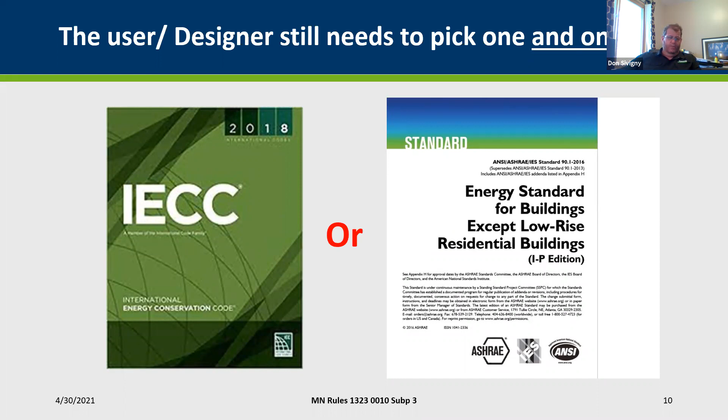Under federal law, we as a state are required to review ASHRAE Standard 90.1 1989 or its successor standards as they're published regarding energy efficiency in commercial buildings. So we're required to review every ASHRAE standard that comes out to determine whether it's one we will move to, through our rule process and adoption process, using tag committees and similar methods.

On February 27th, DOE issued a determination saying the 2016 standard would achieve greater energy efficiency by about 8.2%. That's important because if they determine it does not achieve greater efficiency, states aren't obligated to review and adopt it. Once the determination is made that it would achieve greater efficiency, we have a time frame we're bound by to review and adopt, or at least review and let them know whether we're adopting it and why or why not.

On April 21st, 2021, they issued the determination on the 2019 standard. That's where the time clock started on the department reviewing things and determining what would happen regarding adoption of that document.

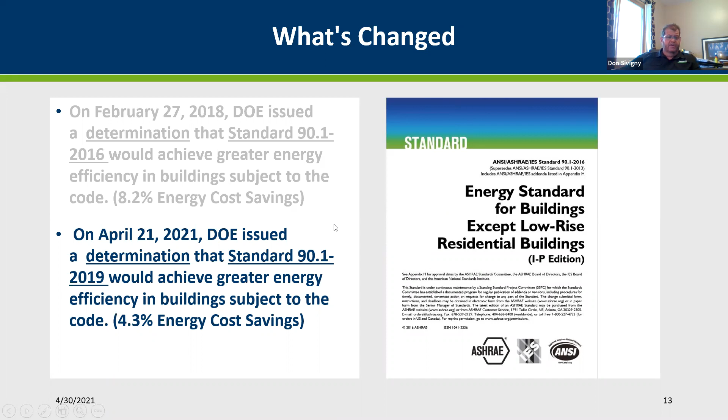On May 28th, the department will be presenting a report to the Construction Codes Advisory Council about that review of ASHRAE Standard 90.1 2019. Greg Metz chaired the Technical Advisory Group, or TAG Committee, and they will be providing that to the Construction Codes Advisory Council for their consideration on energy for commercial buildings in the future.

DOE does not do any official determination on the commercial provisions of the IECC. They only look at the ASHRAE standard and don't officially report on the IECC. So we're following federal law.

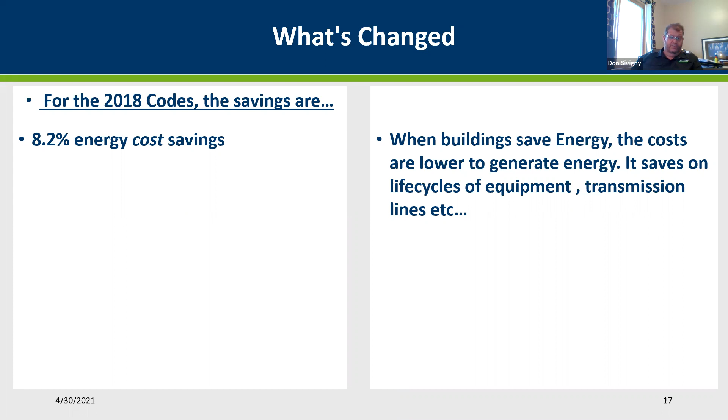They estimate the national savings on commercial energy codes for the 2018 code at an 8.2% energy cost savings. Energy cost savings occur when buildings save energy, the costs are lower to generate energy, and it saves on the life cycle of equipment, transmission lines, and other things. The more energy product put through them, the more wear and tear on the equipment. So by reducing energy use and energy costs, they can now increase the life cycle of the equipment.

There are requirements for source energy. The cost of technology has been reduced, providing off-site and on-site options for renewable energy, such as solar, which is becoming very popular and has grown dramatically. As you drive around Minnesota and the country, you see more solar fields, a lot of times owned by utilities, feeding into the grid system of the areas they provide electrical service to. That's another thing that has increased quite a bit.

Then there's site energy savings, which is what we really go by from a code standpoint. These are the actual savings for each specific new building, based on new codes and new technology, for instance envelope tightness and the efficiency of the envelopes. Creating a tighter building envelope does create energy savings. We understand that tighter building envelopes may require some additional ventilation, but all of that is considered.

Lighting controls are also changing, for offices, hotels and motels, especially suites, where there can be one place that shuts everything off when the occupant leaves the suite for the day. One switch shuts off everything in that unit, the TV, all the lights, and everything else.

Daylighting is a big thing in commercial buildings. We'll talk about bringing in natural light so you can reduce the amount of artificial light you have to produce through luminaires and other things.

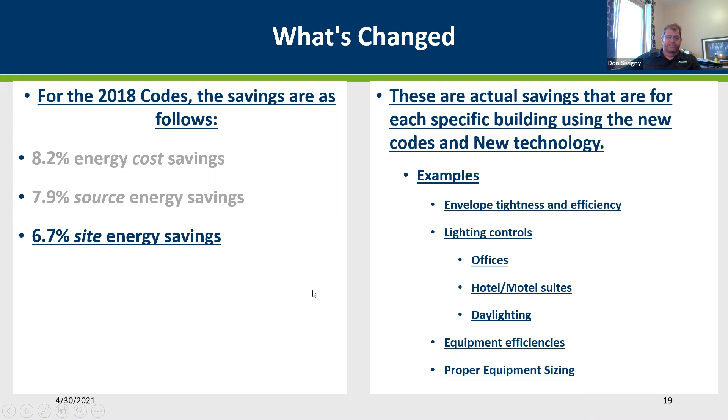Some of the changes we're going to talk about today are in the Minnesota Commercial Energy Code. We're going to review them and go through them as we get through here. Some of them may be kind of confusing. We talk about substantive and quantitative changes and all this, but we'll try to make it pretty simple and put it into some general terminology that everybody understands.

There are not very many substantive changes, probably less than you think, actually. Some are simple changes to the section of the code that don't really have to affect the code language itself at all, but they might be for formatting and things such as that. Those changes happen at the national code level where somebody believes it should be in a different location. We didn't change what the code says, we did change the location, but it is actually a code change. And we look at that national document from that standpoint.

When we get into change of use and occupancies, there are some references to tables and sections that are revised to coordinate with numbering changes made to the 2018 IECC. As we start adding code changes or code language, the numbering ends up changing. So we've seen that in several instances through this document as well.

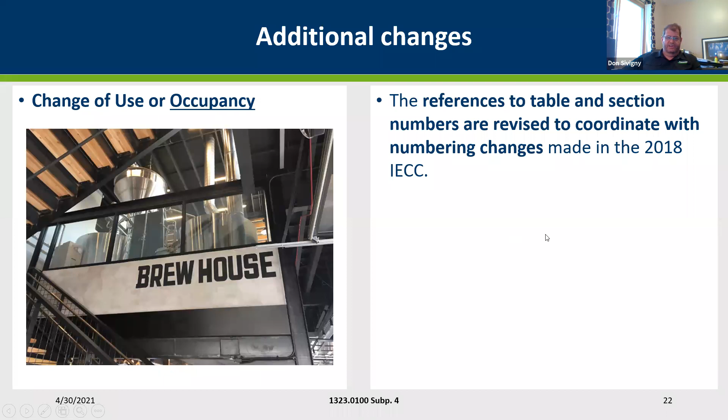ASHRAE addresses changes in use or occupancy as an alteration, and then it sends you to section 5 as it relates to insulation, air leakage, air penetration products, and other portions that are being altered. But it is only for the portions that are being altered. If you don't open up the wall, there's no requirement in the code for you to bring that up to code. The code is typically not retroactive.

We have low energy buildings. We had a previous amendment to this, and we've been able to remove that amendment due to the fact that a repealer is when we remove an amendment, that the requirements for low energy buildings are now located in the IECC in section C402.1.

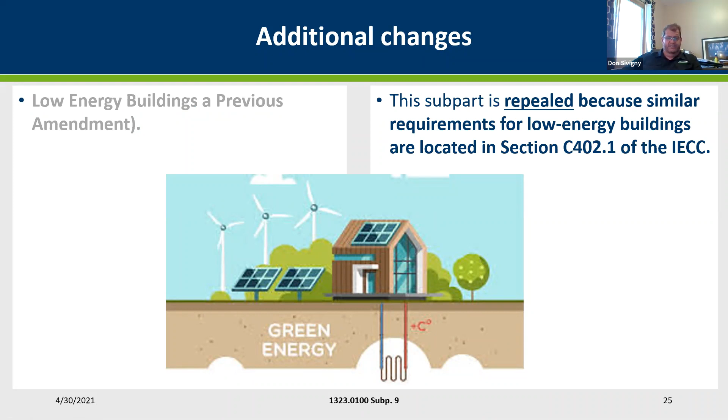For low energy buildings with ASHRAE, they're divided into three different groups essentially. You have conditioned assemblies for both commercial and residential occupancy, and then they add unconditioned assemblies and then semi-heated buildings. So you can have a building that is greater than 3.4, you can use 3.4 to 20 BTUs, and that's what we would call a semi-heated building in the code now, but that's only in the ASHRAE code. The IECC doesn't have that. This is why you need to pick a document and stay with that document.

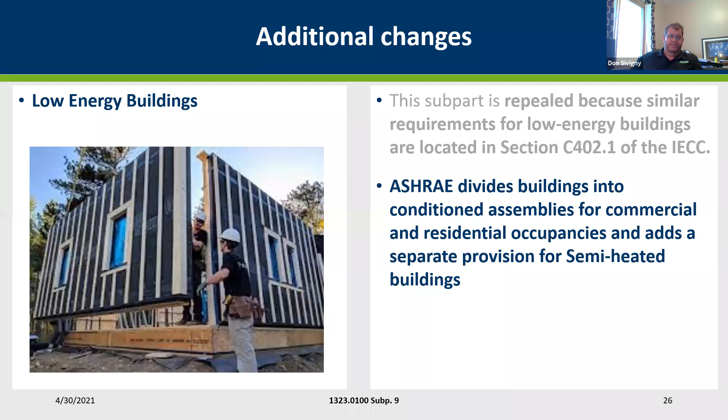The 2012 code did not specifically address greenhouses in any way. They were kind of the odd duck building that was out there. Nobody knew, do I have to enforce the energy code? Do I not have to enforce the energy code? That question came up a lot. And how do you enforce the energy code on a structure such as a greenhouse? That's been cleaned up - greenhouses are now in the code and they're listed as exempt. So they put them in the code to tell you that you don't have to follow it, just to clean that up so that the questions would go away and everybody would be on the same page.

There's a lot of changes in information on construction documents. A lot of details have been reformatted in the format of a list of sub-items. The reason we did that in the codes is to make it easier to use. We want to make the code less complicated, more understandable, and make sure that everybody can come to the same conclusion as they read it.

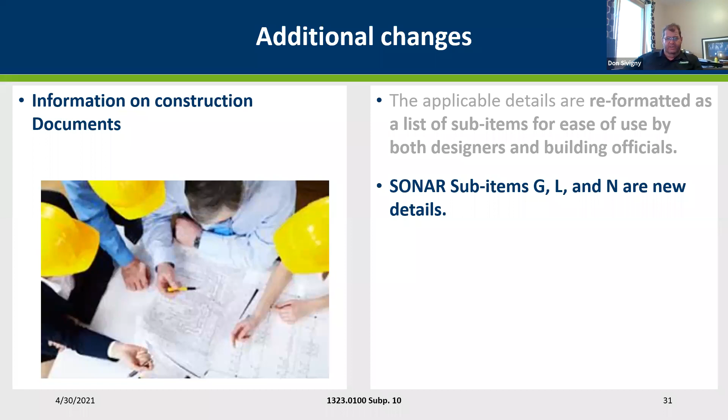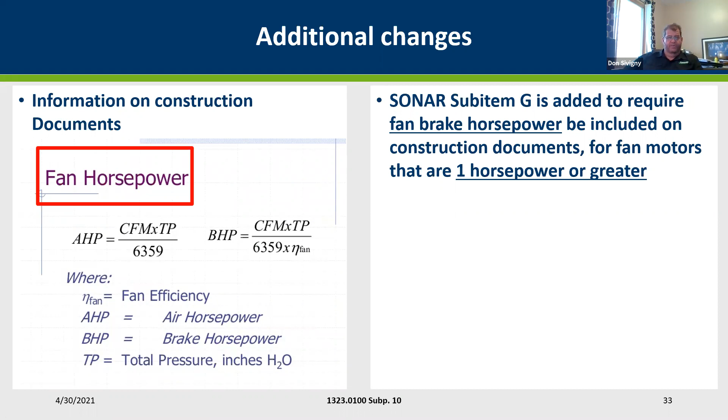The first one is on fan horsepower. It's required to add a fan brake horsepower to the fan equipment itself on any fans greater than 1 horsepower in size. This will guide designers to choose their fans wisely. Preferential treatment for efficiency would be given to variable speed and direct drive fans, as they save substantially more energy.

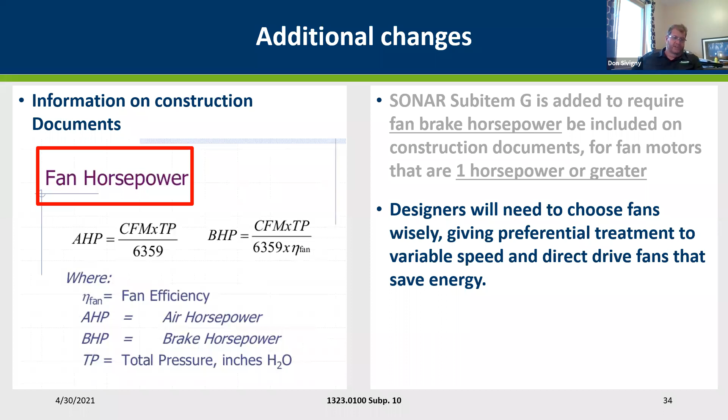We talked a little bit about daylighting. What is daylighting? Daylighting is using the sun's natural light to light the area of space. On commercial buildings that are typically operated during daylight hours, we can utilize the sun's light ray to light the building where we don't need to provide artificial light from an energy source that typically uses a fossil fuel like coal, oil, or natural gas.

Now we actually have a secondary zone. We originally had zone 1. They've now done the research and found that they can add a secondary zone that provides less light than zone 1, as you see in the drawing here, but does provide light at a reduced rate, and we can calculate that in, again saving energy.

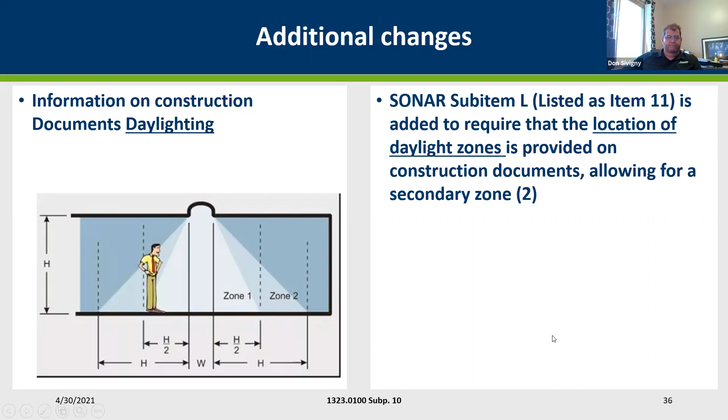Daylighting is the controlled admission of natural light into the building to reduce electric lighting costs. It saves us energy. The sun's got a light ray and a heat ray. The heat ray that the sun sends out is where our windows get involved with fenestration products for heat reflectiveness. They let the light ray through, but they don't let the heat ray through.

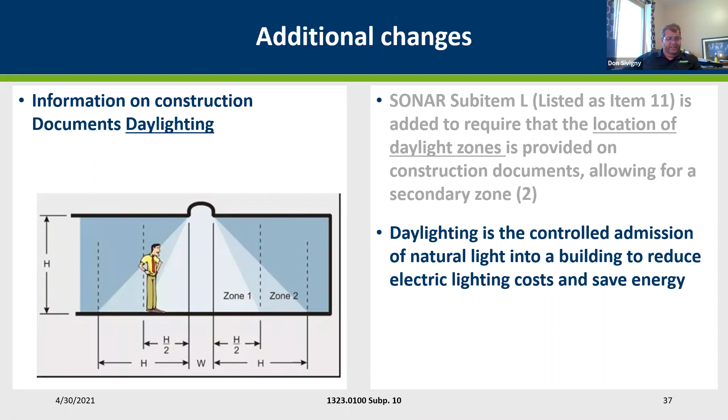Additional details are that they've added sub-item N, which gives the building official the ability to request additional details. We've had cases where a designer is not following the prescriptive approach of the code and isn't using 100% one of the performance options - something in between. This gives flexibility in the design to the designer to work with the building official and come up with something efficient that accommodates the needs of the building owner.

What happens though is that the building official may have questions, and we've had times where they said the building official doesn't need to know that - code doesn't say you need to know that. So they've added something that says the building official can ask for additional details right into the documents themselves. There's also a lot of grammatical changes made to the standard. They're not necessarily changing or modifying the code, but they provide grammatical parallelism and clarity to the enforcement of the code.

There's changes to the definition section of this document. Air barrier construction: the difference between the 2018 and 2012 IECC is that for air sealing of penetrations, we're providing additional guidance for sealing around a very specific item - fire sprinklers. There was never anything in the code to address these, and you've got to be cautious when installing different things around sprinkler heads to make sure we're not impairing that head at all. So they put some very specific things into the code for that.

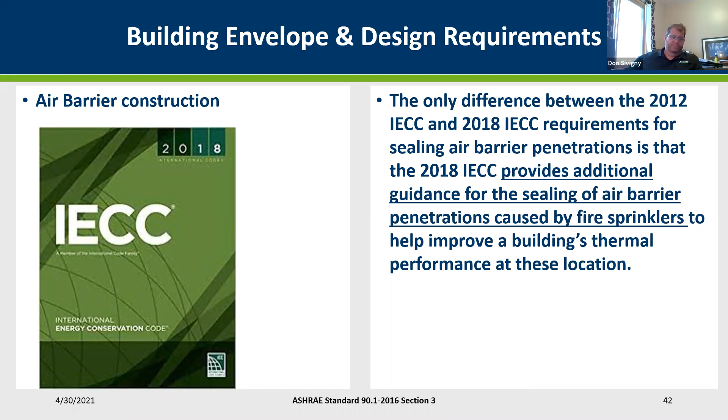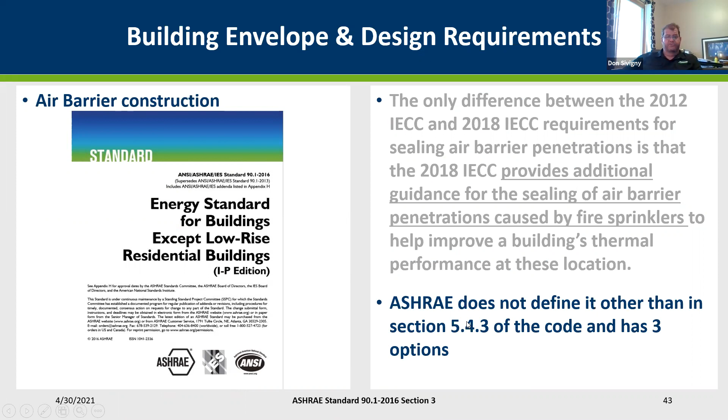ASHRAE does not define it other than to say that in section 5.4.3 of the code, they give you 3 options on air barrier requirements for the building. There's a continuous air barrier design - you've got to provide in your design a continuous air barrier and show where that is. There's 4 sub-items in there to provide you some of that guidance.

There's the installation of a continuous air barrier - this is something a building inspector would see on site, with 5 sub-items they would be looking for at that point in time. You probably could use both of these: the designer designs things, and then in the field, that's part of the plan review for the continuous air barrier design. But when you're in the field, that's where the installation or inspection comes into play. There's another option out there for testing of acceptable materials and assemblies, which requires a whole building pressurization test.

We all know about blower door testing in residential and commercial buildings, but when you get into buildings that are huge in size and multi-stories, how do you pressure test this building? There are ways to do pressure tests on the entire building, but with some of the different wings going out, can you test part of it? This gives you some options to do that.

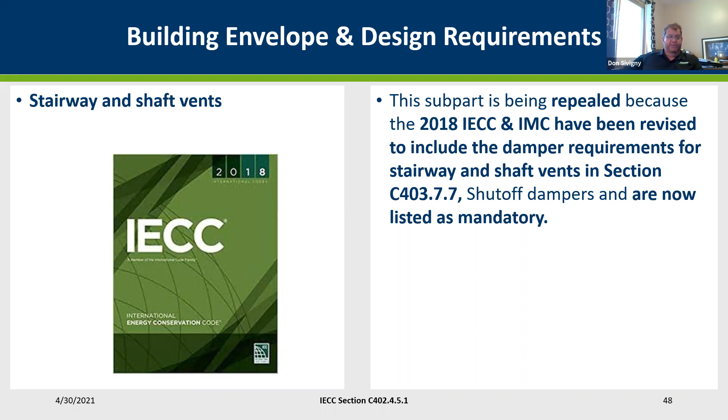There's some provisions in the building envelope and design requirements for stairways and shafts. We repealed this because both the 2018 International Energy Conservation Code and the International Mechanical Code have been revised, and they include damper requirements for stairways and shafts as well. In the Energy Code, it's in section 403.7.7, and these are now changed to mandatory requirements. So you have prescriptive requirements, performance requirements, and mandatory requirements in the code. The mandatory requirements have to be applied to both prescriptive and performance options of the building.

There's requirements for the outdoor air intakes and exhausts as well. This one, again, we repealed due to the fact that it's in section 403.7.7 of the code. And there's also provisions of it in the mechanical code. Again, they are mandatory requirements, so you have to do them no matter which version of the building you want to build, prescriptive or performance.

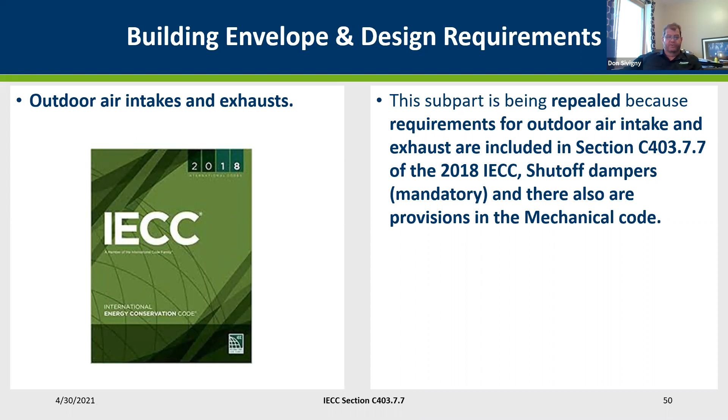Heating and cooling of vestibules. We have an amendment to this one in the current code. We've changed the temperatures there, raising them some to address the issues of freezing that happens in Minnesota climate conditions. If you've ever gone to a retail store with a vestibule, the door is having issues because warm, moist air hits the cold surface out there and freezes. So we've raised the temperature to allow for more heat out there to reduce the amount of freezing that happens.

The other question I get often is, when do I not need a vestibule? Well, if your front entry door of the building opens up to an area that is sectioned off by doorways, not openings, just doorways that close, and is 3,000 square feet or less, it doesn't require a vestibule. So there are some exceptions in the code to that, and that's for our climate zone again, to address the freezing issues.

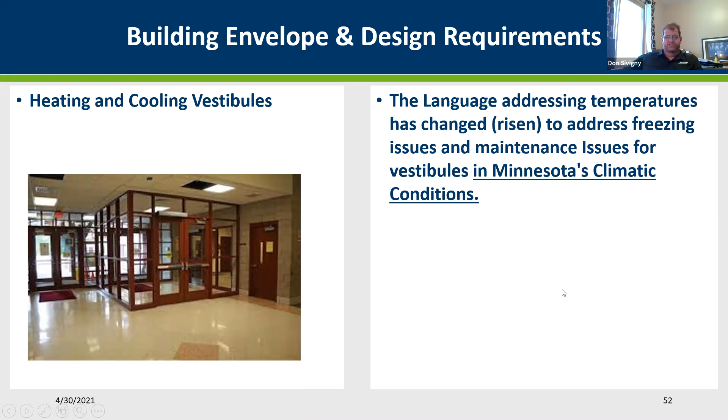There's requirements for minimum pipe insulation in the code. The proposed language modifies a footnote and clarifies that it's not required to have pipe insulation on a radiant heat system. You would think that would make common sense - we have a radiant system, we want that system to release that heat and keep that floor warm, maybe it's above heating downward. Why would we insulate that pipe when the design is to allow that heat to go off? Well, the code didn't say you had to, you could delete it from there. Most people did, but some didn't. So there was a change put into the code to very clearly, in footnote D, tell you that you don't need it if it's a radiant system.

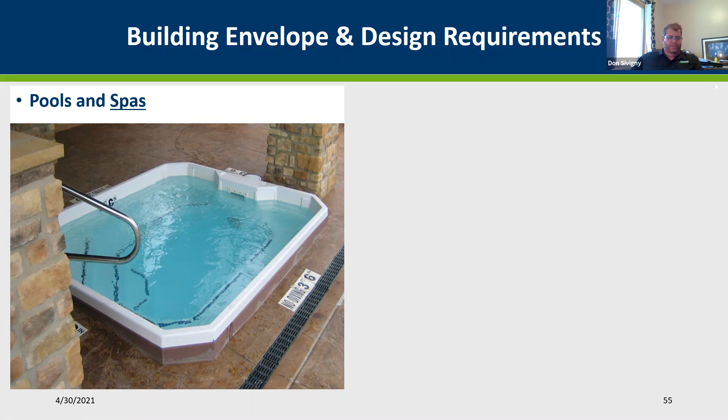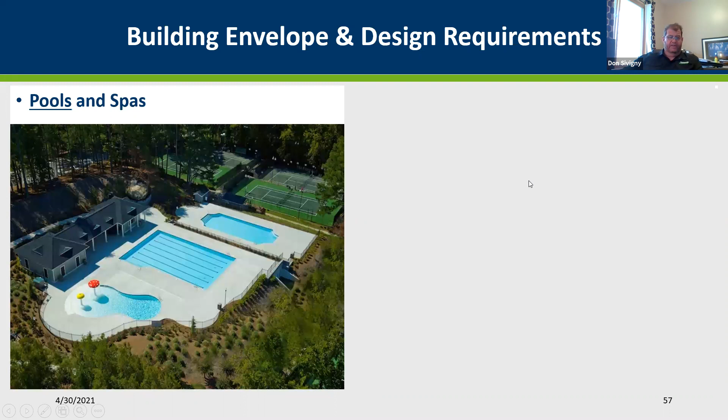Pools and spas. We have a lot of discussion on pools and spas. If you have a spa or a pool, how do you retain the heat on that pool or spa that's being heated? And how do you retain the vapor that's coming off there? Because heat coming off there requires more cooling or heating of the water. And if the water evaporates off, you've got to add more water, typically cold water that has to be heated up. So the code requires a vapor retardant cover on pools and spas unless there's an exception. This exception is modified to increase the percentage of site recovered energy from 70 to 75%. So a pool receiving 75% of its energy for heating from something site recovered, such as solar, then the exception says you don't need to meet this provision of the code. Now in this picture here, we would look at this as three separate pools.

So pool 1, pool 2, and the little kiddie pool would be pool 3. You would have 3 separate covers, and you would look at each pool to see what it's getting its energy to heat that pool from. If each of these pools is getting 75% of its energy from a solar array system, you can omit the cover. If one of them isn't, that one's going to need the cover.

The effective date of this code is March 2020, so we're a little over a year into it, and it's been going very well. I think people are getting on board and catching on. They spend a lot of time with the codes looking at them. Our process is very effective and how we do things is very well thought out, with a lot of input from everybody who wants it. So we usually have a pretty good code, and we haven't had a lot of challenges to this, just some clarifications mainly.

That wraps up the changes for the commercial provisions. Residential provisions we'll get into next. Residential provisions are for the residential energy code, which applies to residential occupancies 3 stories or less in height. Above 3 stories, you're getting into the commercial provisions of the code. So you could have an R2 apartment that is 3 stories in height, meeting the residential energy code. An R2 apartment that is 4 stories or more would meet the commercial energy code. You have to look at the definition of residential buildings in the energy code, which explains that. From the standpoint of what is a commercial building, we simply said all buildings not determined as residential, and we've done that in our codes for years.

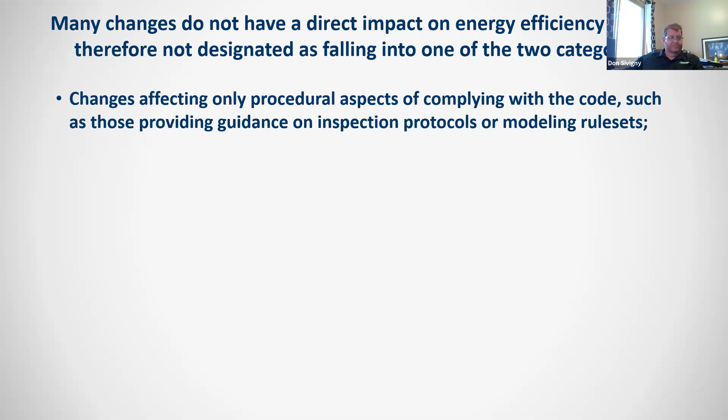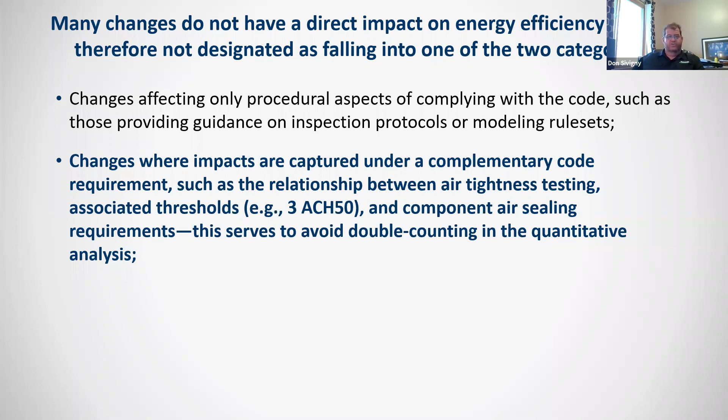Those aren't considered. Changes where impacts are captured under a complementary code requirement—the relationship between air tightness testing and all those associated thresholds, along with sealing of equipment, appliances, and penetrations—serve kind of a double purpose. So we try to avoid that, and we don't count it in the quantitative analysis.

Changes that are targeting non-energy aspects of the code, such as water efficiency requirements, aren't counted in their analysis. And then administrative changes, including editorial corrections, the reordering or renumbering of the code, moving things around, or clarifications that may not change the code language.

We just added a few things to be very clear as to what that is. We did not change the intent of that section, but by adding some wording, we cleared up the intent for people to understand how to enforce it.

And then anytime we had reference updates, if you're going from the 2016 ASHRAE to the 2019 ASHRAE, that's a code update. So we don't include those in there as well.

The analysis is a combination of both qualitative and quantitative components. Those are the two ways that they look at this. It's to identify changes that have a direct impact on energy efficiency. As we talked about, there's a lot of changes that don't have a direct impact. The qualitative ones are the ones that do have a direct impact on energy savings in a significant portion of residential buildings. You may not have that exact same savings in every building depending on the specifics of that building, but overall on average in a substantial number of them, you would, and that's what it's based on.

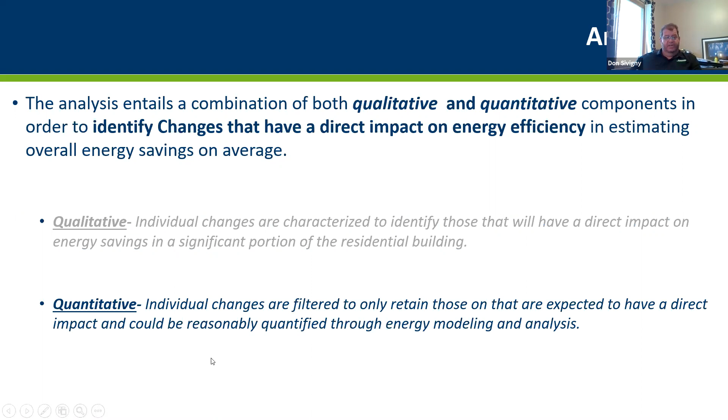Quantitative is filtered changes that retain only those expected to have a direct impact, and then we have to be able to reasonably quantify them through energy modeling and energy analysis.

Of the total 47 changes that the ICC approved at their hearing for the 2018 IECC, 14 changes have a direct impact on energy use in residential buildings. 11 are expected to reduce energy use, and 3 are expected to increase energy use.

Now, some people find that to be a little bit of a funny thing because we passed codes that said we're going to allow the increase of energy use. Sometimes that's better. The vestibule that we have in Minnesota changed to increase the energy use of that vestibule, increase that temperature a little bit, and add substantially more good qualities from a life safety standpoint, that if somebody's trying to get out that door and the doors are frozen and not operating, you're going to start backing people up in an emergency.

And so sometimes we will do that, because they typically will give up an energy thing every time, saving a little bit of energy, to increase a life safety thing. There's just no comparison to say, look, we're going to save a few dollars here, but we're going to injure or have other things happen to several people. That's just not how we want to do things.

There were 33 additional changes that are administrative or have no impact on the energy portions of the code. They're all the non-energy portions of the code—renumbering, clerical things, different stuff such as that. So of the 47, 30 were administrative, 3 were not energy related, 3 increased energy, and 11 decreased energy use.

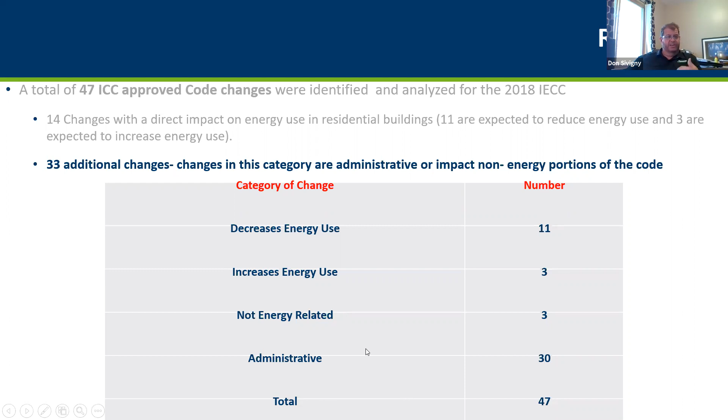As you can see, now we would have done this 10 years ago as the codes have progressed. The increase in efficiency is getting less and less until new technology is developed. And as new technology is developed, then we can increase that efficiency again, typically. But at some point in time, we run out of these big jumps of energy efficiency increases because technology hasn't caught up with us. So we're still increasing energy and percentages are still good, but we are seeing each year those things tend to drop a little bit.

Of the changes characterized that have direct impact for new homes, only 2 are expected to have a significant change on those new homes. One is window U factors, which is the calculation of energy loss through the window system. The code was currently at a 0.32, and it is now down to a 0.30, which is a jump in savings for them.

The other one is high efficacy lighting, seeing the fact that we're using better lighting fixtures. We went from incandescent bulbs to fluorescent to LEDs and other units of light that are much more efficient. If you take a 60-watt incandescent bulb, it's about 13 or 14 watts in a fluorescent. You get it to an LED, it's maybe 1.5 to 2 watts. So there's a significant energy savings there. And those are the 2 main ones of all of these changes that actually were warranted to have further quantitative analysis done on them.

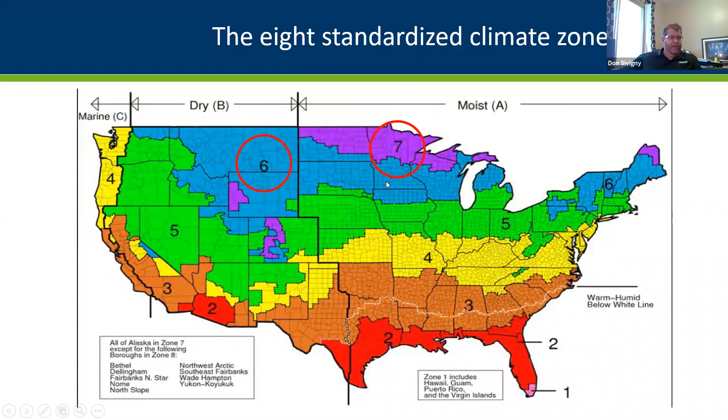We are currently using the 8 standardized climate zones. These are the climate zones that were in the 2012 code, as well as the 2018 IECC and the accompanying ASHRAE standards. However, this ASHRAE table is going to be changing, as you can see in the first map here.

There are 7 different counties changing from the northern zone to the southern zone. Down in the southern part of the state, the national map has 3 counties that could be considered climate zone 5, but the numbers are so close that this committee is choosing to probably leave them in climate zone 6. There was discussion on that, and Ben, you were part of that as well. So we're going to see the climate zone map change, and we'll start seeing some efficiencies that are a little better because we're going to be accurately representing what the climate zone is there.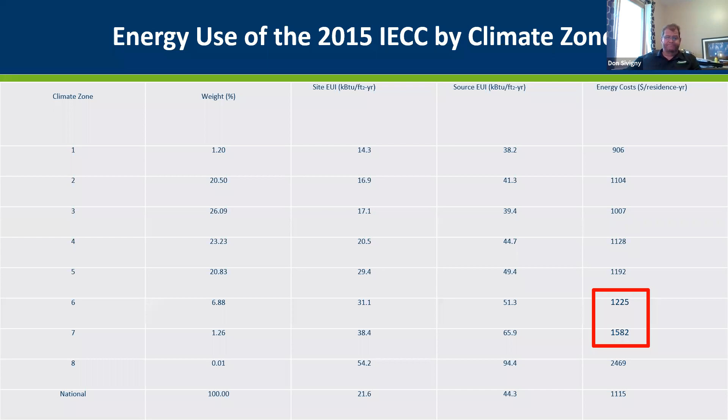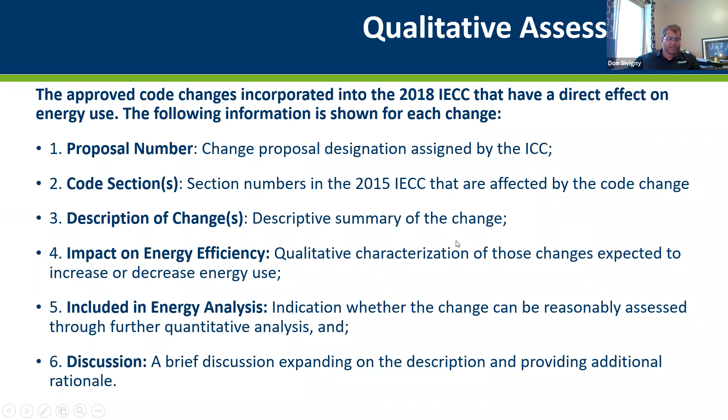The qualitative assessment was done. We'll go through these so you understand how the graph lays out. We're again incorporating things that have a direct effect on energy use. We'll show information for each change: a proposal number at the very beginning, then a code section, a description of the change, its impact on energy efficiency, whether it's included in the energy analysis, and then a short discussion. I've also added some information on Minnesota and what we've done there.

The first one is code change RE17, Residential Energy 17, from the 2016 code hearings. It exempts log homes designed in accordance with the ICC 400 standard from thermal envelope requirements. I've sat on that standard for a while—those folks are working very hard to increase energy efficiency in log home building every day, and we move forward with that in the national codes. It allows substantially less efficient walls than the IECC does, which could increase energy use by having log homes not meet the code provisions, but it's a relatively small portion of our housing stock, roughly less than 0.5%, about 0.4% of new homes.

It's not a typical featured home in the state or the country, but there is a very specific clientele and a very specific builder group that does build these across the country and across the state of Minnesota.

Minnesota code currently requires a minimum of a 7-inch diameter log. Nothing less can be used. We adjusted that due to the fact that in Minnesota, to use a Minnesota log with our climate conditions, we have a much shorter growing season. For our builders, log home builders, and our log home industry to compete, we have to make some of those adjustments. It's similar to the ICC 400 standard.

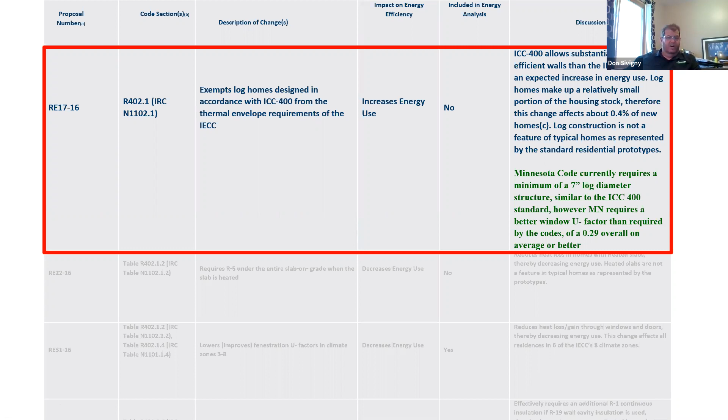The next one is RE22. It requires an R5 insulation under the entire slab on grade when the slab is heated. Now, this should decrease energy use. This wasn't one of the two that we actually took on and looked at again with further analysis, but it reduces heat loss with heated slabs especially.

It's decreasing the energy use because what's happening is those heated slabs, if you don't have insulation under the heating system, the heat goes down into the earth and doesn't do any good for the floor system. So by installing insulation under that to force the energy to go the opposite direction, that slab stays heated at a greater temperature. The heat system doesn't have to kick on as often to keep it at temperature, and it does represent a lot of energy savings.

Manufacturers of these heating systems, under the provisions of their installation requirements, have already been asking for and requiring this for years. It's been placed into the code, so now it's in 2 locations. The code says you need to follow the code and the manufacturer's installation instructions, whichever is most restrictive. In this case, these are going to be identical, so it's going to keep the heat in the slab and not allow it to go into the earth.

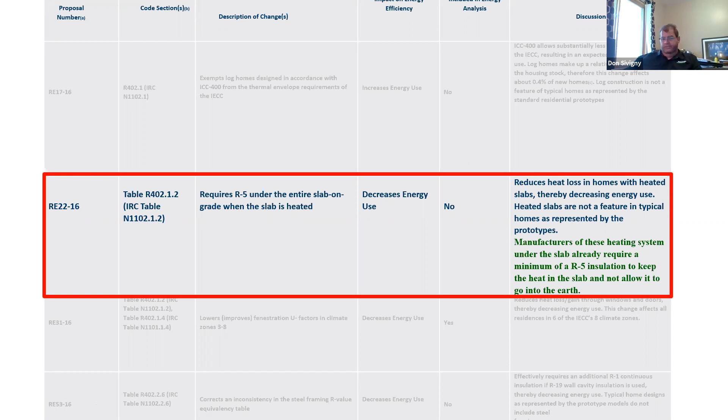So it's really not a change for what we've been seeing, but it is a change in the code by adding the language to make sure that if for some reason a manufacturer said you only need an R2 underneath there, the code is more restrictive and is going to say an R5.

One of them we did look further at is that window U factor. Again, adding better U factors to the windows reduces heat loss or heat gain through windows and doors, decreasing energy use. This change is going to affect 6 of the 8 climate zones in the United States.

Minnesota builders and homeowners, we recognized this many years ago. We've seen our builders and our homeowners request better windows. We've seen our builders provide better windows. Right now, on average, we're seeing anywhere between a 0.27 and 0.29, I would say.

I have seen some as low as 0.24 and 0.26, as they're just buying better windows, triple pane windows. You see the advertisements on TV now, and what they're advertising is these really high efficiency windows. Some have argon gas in them for energy efficiency and other things. That was one area that technology has caught up with and kept up with, and we're able to use that technology to install better windows and door systems, or what we call fenestration products.

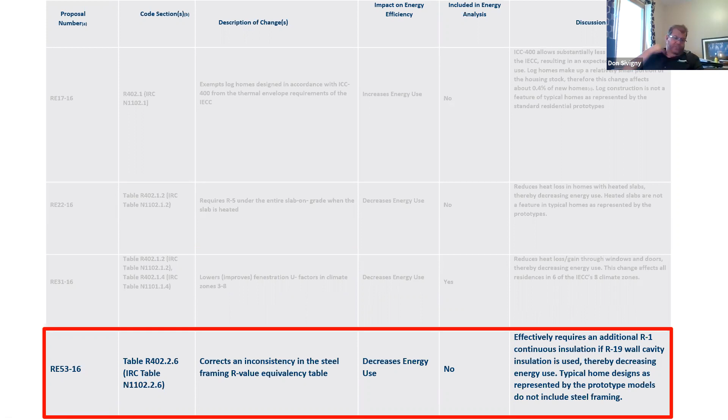Table R402.2.6 under number 53 corrects an inconsistency in steel framing equivalencies. Steel framing is going to have more conduction through the cold formed steel material than wood structures. It's not something we typically see in Minnesota, not a common practice, but as lumber prices go up, you may start seeing more steel construction. As you get into multifamily structures, we are seeing more steel stud or cold form steel construction as wood prices rise. Not common, but becoming more common. Having a table that's more consistent and corrects these inconsistencies is good to go.

We still require an R20 cavity insulation though.

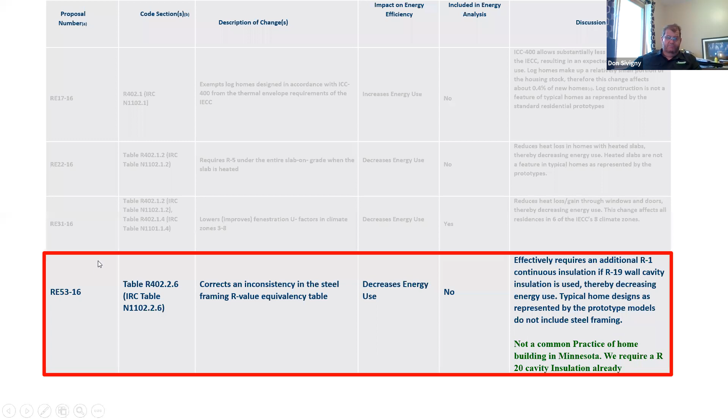The next part gets into the ducts, the mechanical system. I tell people all the time, if you're a builder and don't have a good reputation or working relationship with your mechanical contractor, you should probably develop one, because there's a lot of stuff they do that affects the building and its performance: sizing of equipment, heat loss calculations, proper installation of ductwork, all kinds of different things. They do the heat load calcs, the sizing, air conditioning, heating, ventilation, makeup air, combustion air. You need to get with them and specifically talk about how they need to get into this building and what they need to do.

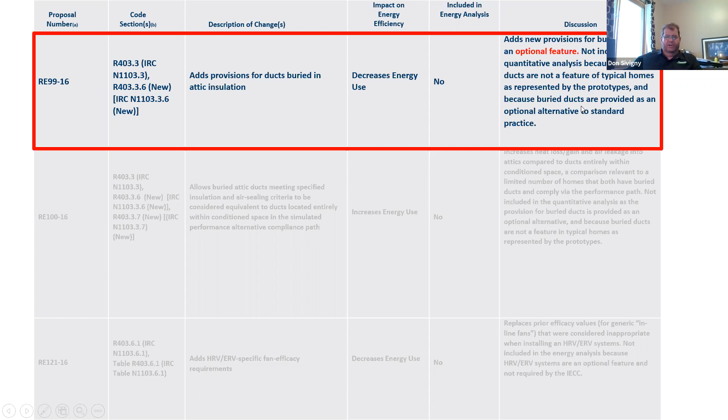It adds some new provisions for buried ducts as an optional feature. So instead of giving no credit for the insulation in the attic, if you put the duct in the attic floor and blow insulation over that, this is an optional feature the code now recognizes and gives you credit for. It's not included in the quantitative analysis because buried ducts aren't a feature in most homes—they try to keep them within the conditioned space as much as possible.

In Minnesota, we require an R8 on ducts that are outside the conditioned space, and that has to have a vapor jacket. The vapor jacket is more for the air conditioning season. As you run cold air through that duct, condensation can happen, and then you get dripping through the insulation, which deteriorates its R value and comes down into the ceiling or through the wall system. So ducts located outside the conditioned space, outside the air barrier, whether in a wall or ceiling, are required to have an R8 with a vapor jacket.

Same thing with any ducts you bury in the attic—they also have to have an R8 with a vapor jacket, because even though it's buried in attic insulation, you're still going to get condensation, and we don't want that attic insulation to get wet. The idea is to keep condensation from happening by keeping the duct colder, so warm moist air can't get to the cold surface where condensation happens. Therefore we don't have the dripping, we don't have the problems. So whether installing ducts above the insulation in the attic, or burying them in the insulation, our Minnesota code is more restrictive and requires an R value of 8 with a vapor jacket on that duct.

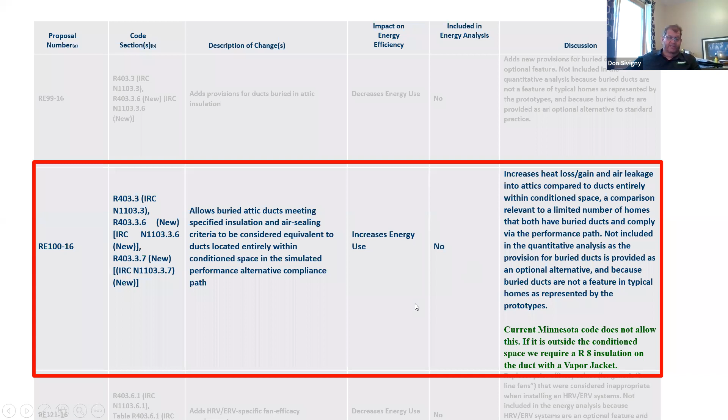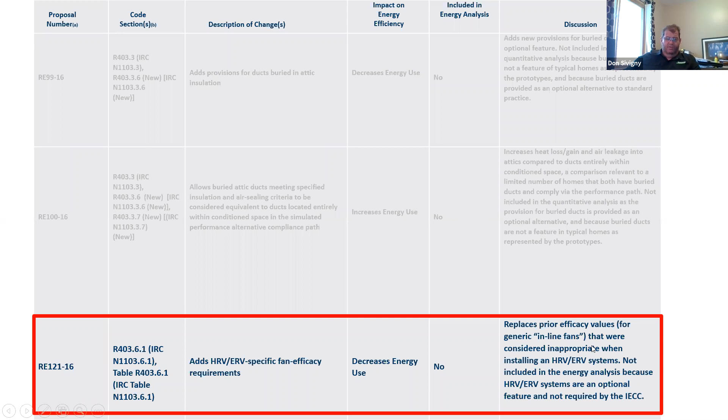HRV and ERV efficiencies and requirements for the efficiency of the fans they use is there. It should decrease energy use because we're getting a more efficient fan, replacing the prior efficiency values. It's not included in the energy analysis because it's an optional feature as well. However, these mechanical ventilation systems are not required to be installed in Minnesota—I want to say that again, we are not required to install an HRV or an ERV. The code says you must provide mechanical ventilation. They're commonly used and meet our strict ventilation standards, but this is a mandate we won't have to deal with much because it's more of a mandate on equipment manufacturers. They supply the fan with the unit, so they have to provide a specific fan efficacy for their design so we can install them in buildings. There may be some HRVs or ERVs out there that don't have the new fan efficiency or efficacy requirements, but the code's not retroactive to make them go back and change them, and it doesn't prohibit using them still. It's on the manufacturing of them from a certain time forward.

Lighting, high efficacy lighting - we went from 75% of the light fixtures (the luminaires, the bulbs) to 90% of the permanently installed fixtures in all homes having to be high efficacy. So you're probably already seeing a lot more fixtures designed with LED lighting or another form of lighting that's much more efficient than the typical incandescent bulb. An incandescent bulb gives off a lot of heat - 400 degrees at the center - where you can't hold onto it, but an LED or compact fluorescent isn't as hot. You can hang onto an LED for a long time before feeling any temperature rise. Increasing that efficacy percentage is a clear reduction in energy use.

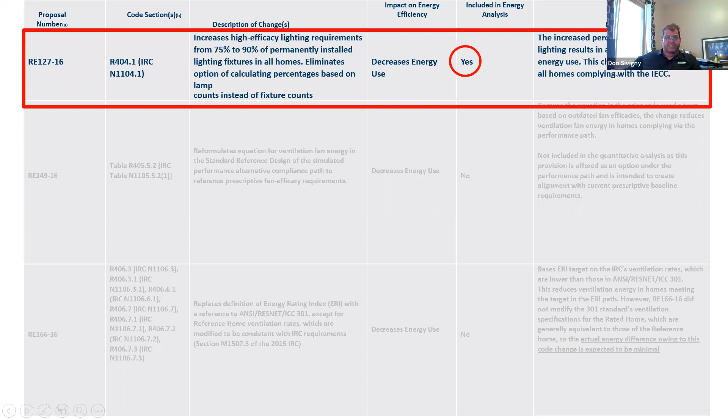And it's changing across the country. In Minnesota, our homeowners and builders are on top of this - it's a fairly simple thing to do. Does it guarantee a homeowner won't replace the LED bulb with an incandescent in the future? No, it doesn't. We can't control the homeowner and what they do - that's just part of the business. The homeowner can do what they choose, but what's happening is manufacturers are starting to stop production of certain incandescent bulbs in certain wattage ranges, because the mandate is you can't produce them after a certain date. So eventually you'll run out of these bulbs.

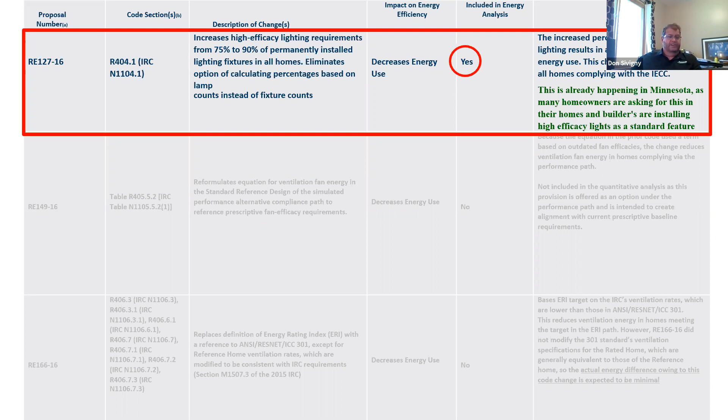There's probably millions of them on the market right now, on store shelves all over. But as you go to buy light bulbs for your home, you'll find in the lighting section many more versions of high efficiency or high efficacy bulbs than compact fluorescents. These are taking up more and more shelf space, while compact fluorescents and incandescents are getting less shelf space, because the efficiency of LEDs and their life cycle is so much greater. It's just such an energy savings.

Okay, the next one is the standard reference design, or simulated performance compliance path. The prior code used a term based on outdated efficiencies, and there's a performance path - so we have prescriptive paths and performance paths. It's not included in the quantitative analysis because it's performance-based, meaning somebody has to do an analysis to show it's meeting the code. We do see that on several homes. It only affects the performance option, not the prescriptive option. We still see a majority of homes done under the prescriptive option, since builders and inspectors just don't understand the intricacies of a performance-based code.

There are agencies and companies doing studies on things such as ERI, Energy Rating Index. It's based on ANSI, RESNET, and now ICC standards - it's a 301 standard, but you have to be trained to do this. It's not something you can just say, 'okay, we're using the ERI, we're good with it because that's what we designed.' Somebody has to show the work that proves you're not meeting the prescriptive option, but doing a performance-based approach, and here's how the building will perform. The building can use X amount of energy; under our performance approach, we're using X minus whatever, creating a more efficient building.

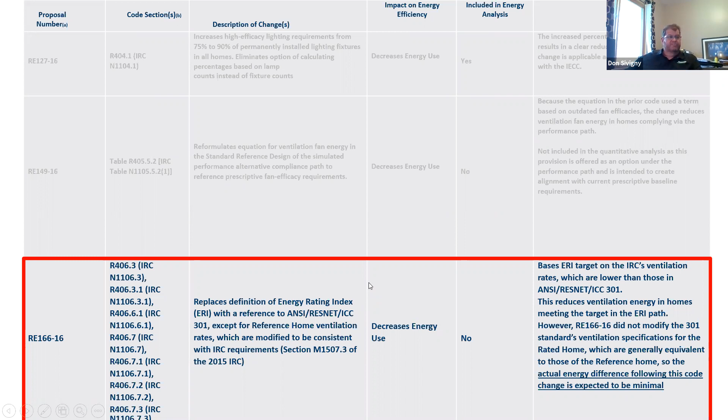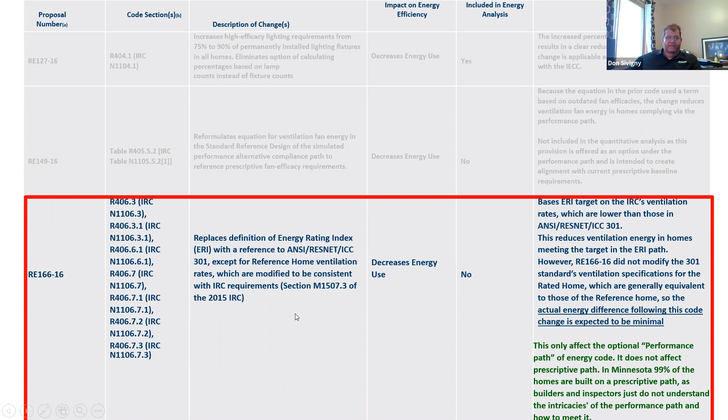The energy rating index is typically done by a third party, unless the builder has someone trained to do this work. It only affects the performance option of the code - that's the key there. It's not prescriptive; you don't do an ERI on a prescriptive building, since that's already met the code. Why would you spend the extra time and money to do this? That's basically that one.

The ERI, they've raised their threshold. They were lower before—the lower the number, the better here as well. Now they've relaxed that threshold. I believe it was 51, it's now at 55. So they've raised it to relax it so that more buildings will meet this. And that standard has been kind of bouncing around a little bit.

It says the building is allowed to use this much energy. If you're equal to that or less, and they can prove it during an energy rating index study, then you're good to go. Now, it's a performance path. There is a cost to this, and I think it's come down since I originally put this program together. But at the time, when I called around and asked these people, it depends on the size of the home, and how much you want them to do—just the design, or the follow-up testing at the very end when they do the blower door test and things like that.

That also tends to include several inspections during construction to make sure you're getting the air barrier sealed in all locations, so that you don't get to the end of the job, do your testing, and the building fails. Now what do you do? That's the wrong time to find out something went wrong.

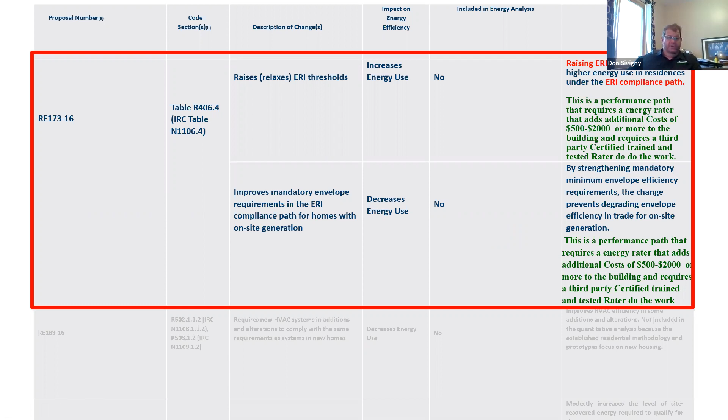Some builders call me and say, I got a townhome and I can't get it to pass. My question is, did you treat the common wall between units as an exterior wall from an air barrier standpoint and seal it? If they haven't, usually they go back and take care of that, and it's not a very big issue at that point. Then it creates a much better envelope, because leaking from building unit A to unit B to next door neighbors makes your unit leak more, and that doesn't meet your requirements.

The next one requires HVAC systems in additions and alterations to comply with the same requirements as a new system. This improves HVAC efficacy. So if I'm putting in a family room or something like that, the first thing I really need to do is look at my current mechanical system and say, is it sized in accordance with the code? Is this going to allow enough heat? If I'm going to use that to supply heat to this new large family room I'm putting on, will the furnace be able to handle it, or will the air conditioner be able to handle it?

Now, with a 40% oversizing allowance on furnaces and a 15% oversizing on air conditioners, you might think, oh yeah, it can handle it—but that's not what the oversizing is for. That's a misnomer. People think that, but it's truly not what the oversizing is for. Oversizing of the equipment is for when the temperature gets above or below the design temperatures.

Example: St. Cloud, Minnesota has a -20 exterior design temperature. So I'm heating my building up there. I'm allowed to oversize my furnace by 40%, because does it ever get below -20 in St. Cloud? Well, sure, probably almost last weekend it got pretty cold. I live in East Bethel, south of there, and I had a jacket on last week and it was chilly. But it's there so that when it gets colder, the equipment is sized to make up for that difference and can properly heat the building.

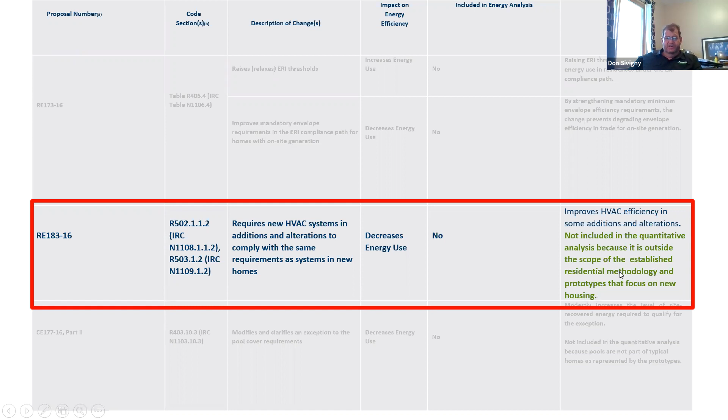It's not included in the quantitative analysis. It's outside the scope of the established residential methodology. So they didn't include that in their analysis. It is a code change, but they didn't include it in their analysis.

We talked about pool covers and the requirements for them, and the fact that in Minnesota, when we do have pools, we're seeing them get pool covers. I think people are really onto the fact that if they put a solar pool cover on them, they can actually heat the water with the solar. And so if they're getting all the heat for that water and they don't provide a heater, even these above ground pools, you put a solar cover on there, as I had one for years when my kids were little, and they work really well because it really heats the water up.

There were days when I said, man, we should leave that thing off, it's like bath water, it's not refreshing when you go in. We never had a heater on that pool, but it maintained temperature just due to the solar cover, and that was a site recovery. We basically had 100% of our energy used for heating that pool generated from solar. It doesn't mean you have to have solar panels on the roof of the house or on the ground anywhere—it could be as simply a cover rated for solar that allows heating of the water, and it also acts as a vapor retarder at the same time.

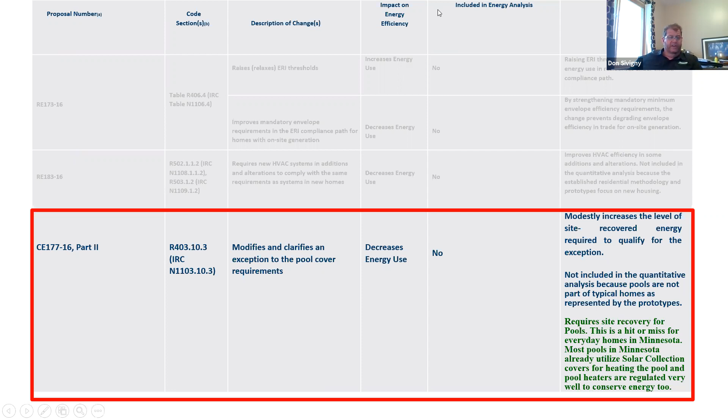So of the 47 approved code change proposals analyzed for the 2018 IECC, only 14 changes had a direct impact on energy: 11 saved energy, 3 increased energy, and that's okay—that's okay if that happens. On May 2nd, DOE did a preliminary determination on the 2018 code and said it will improve energy efficiency in residential buildings.

1.9% energy cost savings—you see, these numbers are kind of low. The 2015 code was 0.98% here for total cost energy savings. This is the cost required for the building's functions. So the total over 6 years on that was only just under 3%.

1.9% for source energy savings. As we talked about earlier, when you have the source of energy required to the building—generation, transmission lines and everything else—that's increased again over the 2015 code because of new technology, and again just under 3% from the last 6-year cycle. Then the one that is really on-site, what the consumer sees, is 1.68%. From 2015 to 2018 it was only 0.73%, just about 0.75% from 2012 to 2015. So it's just under 2.5% increase in energy efficiency on a 6-year cycle.

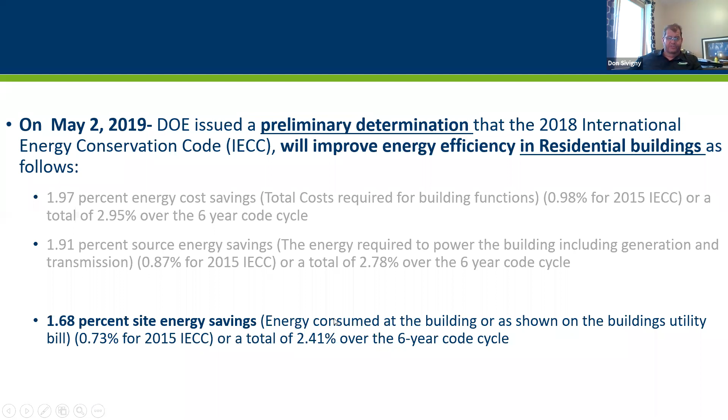Now, to get to that 2.5% or so in the 6-year cycle, there are some costs associated with it. So what is the ROI, or the return on the investment? Well, as we look at the graphing from Pacific Northwest Labs, you can see they started back in 1975 graphing, then the commercial energy codes, the model energy codes, in 1983. Then in '86 they split it into residential and commercial. The green is the residential line, and the yellow is the commercial line.

You can see the increase in efficiency as we go through here, as the ASHRAE standard went from 90 to 90A and 90.1, staying at 90.1 but with different years on 3-year cycles as we've gone through, all the way down to 2010. In the IECC, in 2000, we went from the 1998 model energy code to the International Energy Conservation Codes, when the International Code Council published their first codes, the 2000 codes. There wasn't a lot of efficiency increase between 2000 and 2006.

But from 2006 to 2009 and on to 2012, the Department of Energy was charged with creating a 30% or more increase in energy efficiency for all residential buildings across the country. So they got very active, getting into the code hearings, the research, ways to do things, and providing tools for everybody to document this. You can see there's a dramatic increase in energy efficiency all the way down to 2012.

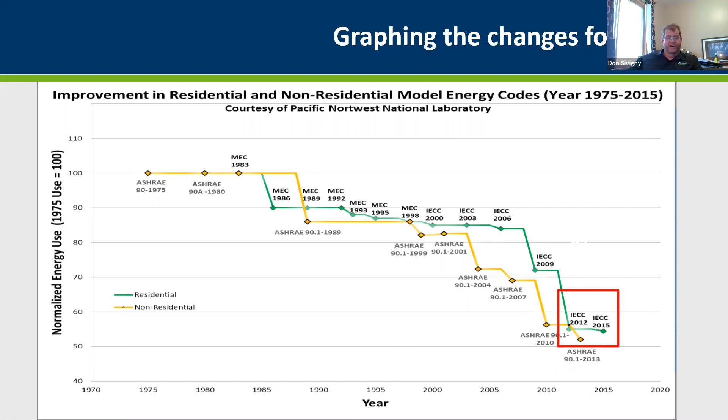Then again, because we brought all this technology into play, between 2012 and 2015 we had a slight increase, but not as much as you'd hope for. We caught up with technology, and now technology has to get ahead of us again. From 2015 to 2018 there was very little increase in efficiency, less than 3%.

So you ask the question, and we get this asked all the time by agencies, builders, owners, and everybody else: to do all of this, what's it costing me, and where's the ROI, the return on the investment? So let's talk about Minnesota's climate zones, specifically how this is looked at and why we go forward with what we do, and how we look at and adopt the codes.

We take this into consideration—it's something we do need to do. The cost effectiveness is based on expected changes in construction costs related to the energy savings analyzed for these two climate zones, Minnesota's climate zone 6 and climate zone 7, based on the analysis done by DOE's established methodology for the International Energy Conservation-based codes.

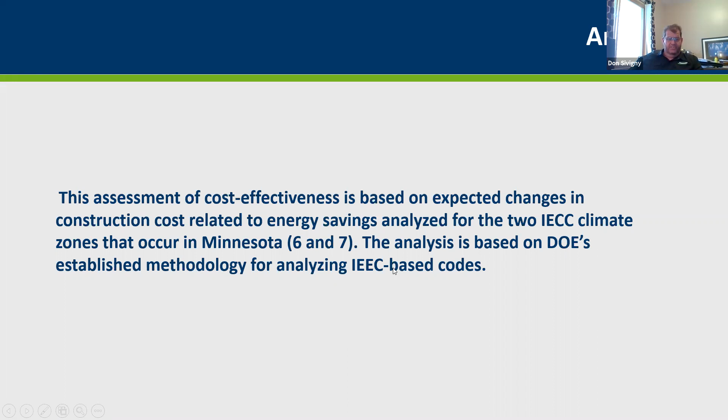They evaluate 32 different residential prototypes, consisting of 2 different building types, 4 foundation types, and 4 HVAC types in each of the 2 Minnesota climate zones, by simulating weather data.

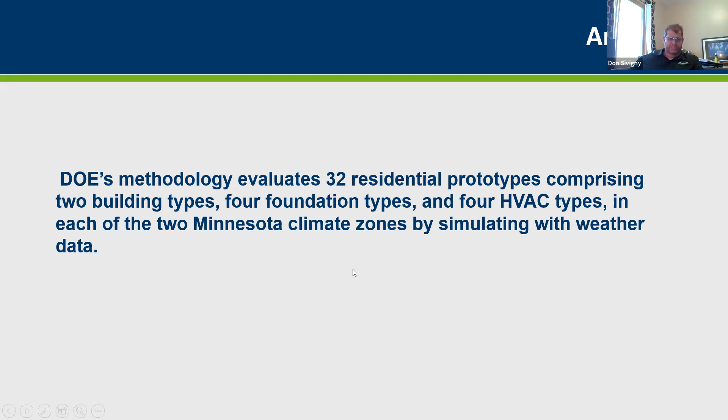We've got research facilities in Cloquet and Rosemount that we used when Dr. Goldberg did the research for our building durability research study, simulating southern and northern climate zone Minnesota and how those foundation systems will perform, utilizing those agencies and facilities. Minnesota climate zone 6, the southern climate zone, is based on Minneapolis-St. Paul data, and for climate zone 7 they utilize data from Duluth.

Here's the current climate zone map. This is going to be changing a little bit as we get into the 2019 ASHRAE document—not sure if the IECC went there or not, but ASHRAE did, for commercial buildings, and that's where we're currently reviewing. Stay tuned for information further on that when we get final decisions.

The current Minnesota foundation has a research study we have to do every time for a durability standpoint. It's got a trade-off allowing a reduction of foundation wall insulation; the research grant study showed that you need an R15 on the exterior of the foundation. So there was a proposal, passed through, that there could be an R10 if the tested envelope leakage was less than 2.6 air changes per hour at 50 pascals of pressure.

So essentially the code would tell you R15, but in 402.2.8 of the residential code there's an exception that says if your building passes an air change rate of 2.6, which is 0.4 below the 3.0 for a 15, then you can go with R10 on the foundation wall, but it's got to be on the exterior side—because of durability issues, that's the reason for it being on the exterior side.

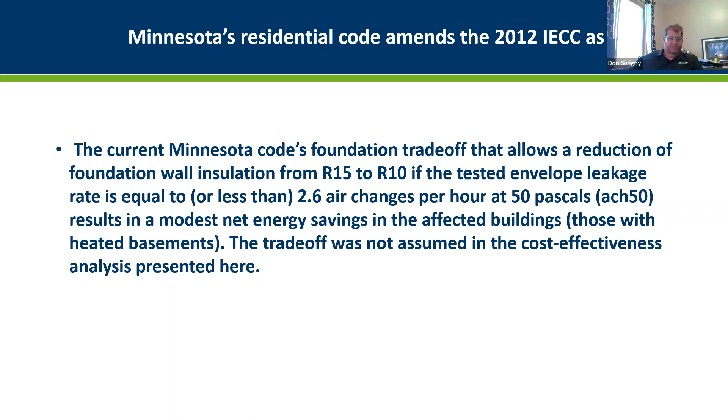It results in a modest net energy savings in the affected buildings, those that have heated basements. It was not assumed in the cost effectiveness because this came on very late in the adoption process—it was placed in the code near the end of the adoption process and has not been included in the foundation durability study at that time, because the study was already completed.

Based on the Minnesota statute, if we change to a new energy code for residential buildings - and we haven't, the last cycle we did not, we stayed where we were because the increase in efficiency wasn't enough to offset the cost - then if we end up finding technology that says we need to update our residential code, we will end up doing a foundation study again, which will include it.

It was there for a couple of reasons. One, for an energy efficiency reason, but two, for a durability reason. Durability was probably the bigger of those two, in that we were having problems with moisture in walls, in the basement walls. We were getting many calls on green looking mold that's kind of slimy looking in the corners, which could be penicillium or stachybotrys - things that are just not good to be breathing in.

So the foundation research had to address moisture loading on foundations, and that's what it does. And it does it very well.

Now, the very positive thing is, after the fact, came in the radon provisions of the code, where we are now ventilating the soil gas of radon from beneath and around our foundation system. Interestingly, in and below that foundation system there are other gases in the soil - methane, herbicides, pesticides, and a real big one called moisture. When we're ventilating that soil gas of radon out, we're also ventilating all of those others out.

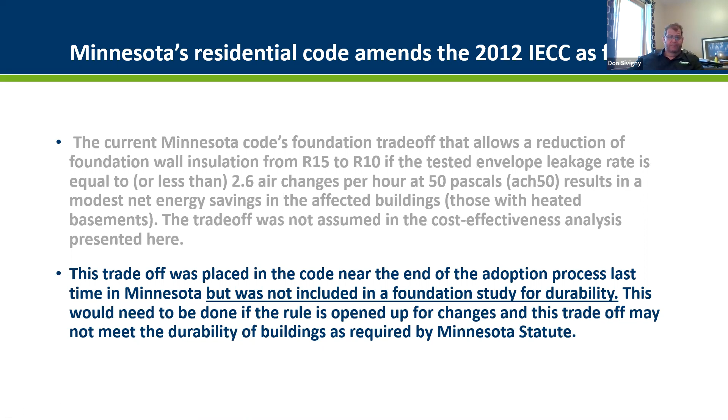So, wood frame wall R-values. The 2012 IECC required 20 plus 5, and 13 plus 10 in climate zones 6 and 7. We didn't change from the 2012 on the residential energy code - we have the exact same energy code for the 2018 version, verbatim, line item per line item.

So it's basically the 2012 code moved forward without any changes, because the efficiencies of going to the higher values and the cost factor didn't offset - we had some differences there, so we stayed with what we had. So when I say 2012, it also means 2018. It requires a 20 plus 5 in the national code, or a 13 plus 10, depending on your climate zone.

We amend that to an R-20 or a 13 plus 5. That's for climate zone 6, the southern climate zone. Then in the northern, colder climate zone, we have an R-21 requirement.

We kept the cavity insulation only option for two main reasons. The residential industry was just not ready to address the complexities of flashing exterior openings to foam insulation on walls with systems that will keep the water out. We still see some challenges from time to time, even on commercial buildings where we have design professionals involved.

On the residential side, the industry is moving so fast - they do a great job building our buildings, but the complexity of installing flashings and fastening them to foam insulation around window and door units, and extension jambs that got to be extended out, the industry just was not ready for that, and they told us that. The other thing is the majority of the builders wanted to keep a cavity-only option.

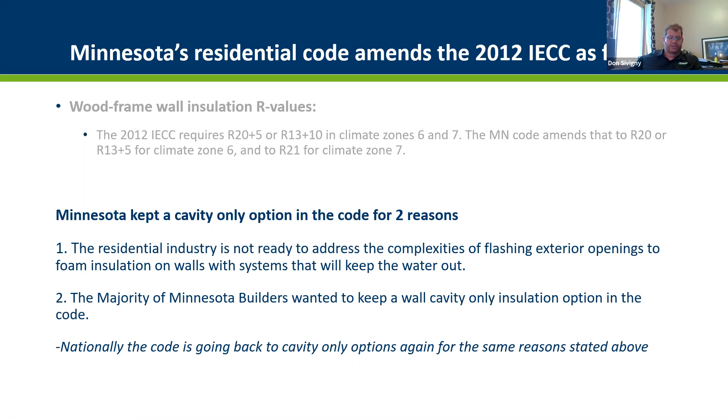Basement and crawl space wall insulation, that's where we get into dealing with the fact that you've got to understand moisture migration, moisture dew point calculations, and things like that. The 2012 code requires R15 or R19 in climate zone 6 and 7 respectively, with the insulation extending to the finished floor, 8 feet for basements.

The Minnesota code eliminates the R19 cavity option. The reason is because we knew at the time this came out, the building foundation research showed that the R19 cavity was a bacterial breeding ground and would hold a lot of condensation and moisture. So we eliminate the R19 cavity, and for the R15 continuous, it requires at least R10 of the R15 total to be on the exterior side of the foundation. Not more than R11 can be on the inside.

It's all about calculating dew point, and it's based on the durability study we did under state statute. We've done it twice, and both times we had the same results. Different methodologies, different testing equipment, different materials came back with the same results. It's a performance of moisture loading.

Minnesota code requires basement insulation to extend down to the top of the footing or 10 feet, whichever is less. That's on the exterior. On the interior, we typically see them run an R5, probably a foam board of some type, on the interior side that runs to the top of the floor, because when they put the floor in, they've got a radon system underneath there. They have to caulk the edge of the floor to the foundation wall so no air can come up there. And if that's done right and done well, you can put that foam board on there and you're not going to have an issue with moisture condensation and durability issues.

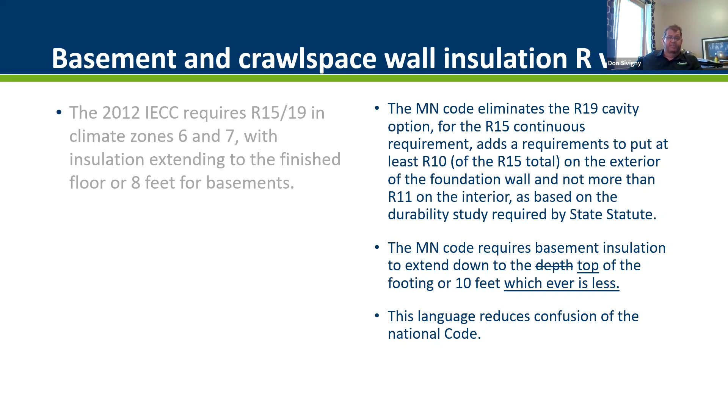DOE's methodology does not accommodate for splitting that insulation on a foundation. They basically look at it either on the interior or on the exterior, so they simulated it as a single layer R15. And with conditioned crawl spaces that we have in Minnesota, DOE doesn't have them regularly around the country, so those weren't part of their analysis either. So when we did our foundation analysis, we had to take those into account too.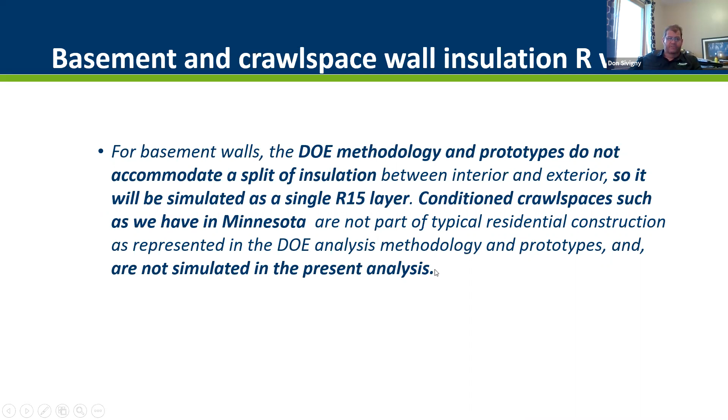The 2012 code requires R8 on supply ducts located in vented attics and R6 on all other ducts. So when you're running ductwork into an attic, we try to avoid that in our climate zone, but when it has to go there, it has to be insulated with R8. And as we learned earlier from the mechanical code, it also has to have a vapor jacket on it.

Minnesota code requires various values ranging from 3.3, depending on what the duct is. There are some specific ducts out there with performance ratings designed to be R3.3 and not condensate, up to R8, and we add that vapor retarder requirement. The absence or presence of the vapor retarder has no effect on energy consumption based on DOE's methodology. If it's outside the envelope and conditioned space of the building, it isn't taken into account because it doesn't affect the actual building living area.

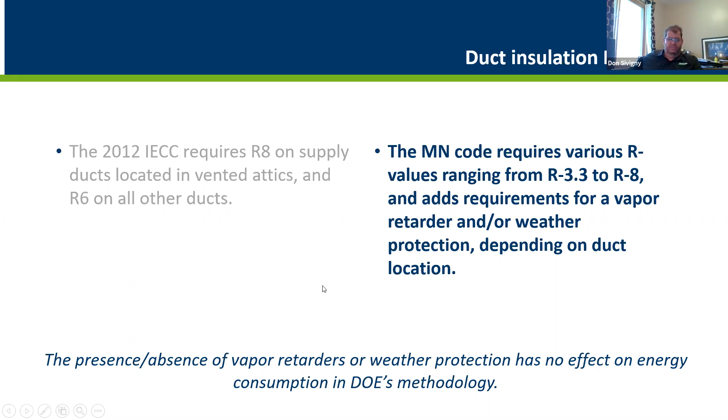Ducts outside the building, and outdoor air intake and exhaust ducts, once they come in within the conditioned space, need to be insulated to an R3.3. DOE doesn't consider these ducts in their analysis, so it didn't have any effect on the comparison, but in Minnesota we've addressed these because we know the issues.

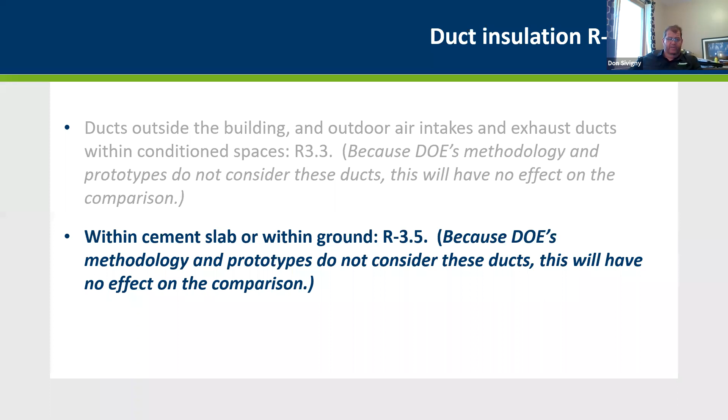If you're within a cement slab or within the ground, you need to be a 3.5. Again, DOE's methodology doesn't consider these, so they aren't part of their comparison, but we know what we need to do in Minnesota, and we've required this. Many other states are doing the same thing.

Attics, garages, ventilated crawl spaces, the same, R8. They don't consider ducts in garage.

You can't heat the garage with the furnace from inside the home because you can't have any openings in the garage into the mechanical equipment. If you have supplies and or returns, it can breathe back in fumes that we don't want brought into there. Spilled gas fumes get sucked back into the return air plenum, and when the igniters ignite the flame in the furnace, we've got a major problem with an explosion happening.

So you can't put supply or return ducts into a garage, but if your ducts pass through the garage, they still have to be insulated to that R8.

If you're inside conditioned space, there is no requirement for insulation. So we're seeing the fact that because of having to insulate ducts that are installed in exterior walls, the reason they're having to be insulated to an R8 in the wall cavity is because they're outside the conditioned space.

The space is typically conditioned with forced warm air moving it around, and you have an air barrier behind the gypsum that stops that air from getting into the wall cavity. So anything in that wall cavity is now outside the conditioned space. Therefore, you need to make sure that those ducts in those walls are an R8.

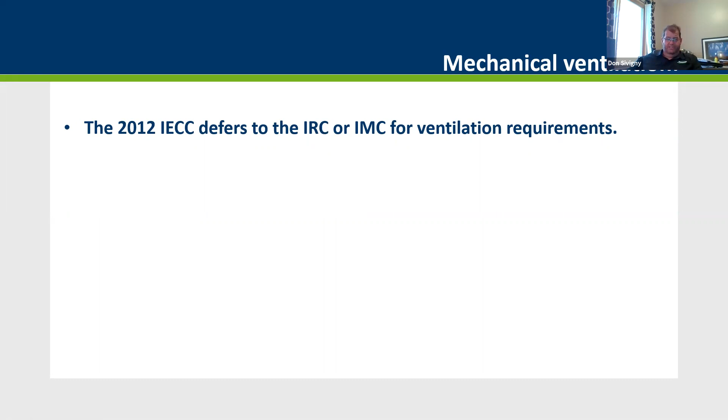For mechanical ventilation, the 2012 IECC defers you to the IRC on the mechanical revisions, the mechanical parts of the IRC, which we don't adopt in Minnesota. So therefore, you would go to the IMC for ventilation requirements based on the 2012 documents.

2012 IRC, which is used in the DOE methodology, requires the equivalent of continuous ventilation of 60 CFM for about a 2,300 to 2,400 square foot home with 3 bedrooms, single family home, and 45 per dwelling unit on about a 1,200 square foot per unit multifamily home that has 2 bedrooms.

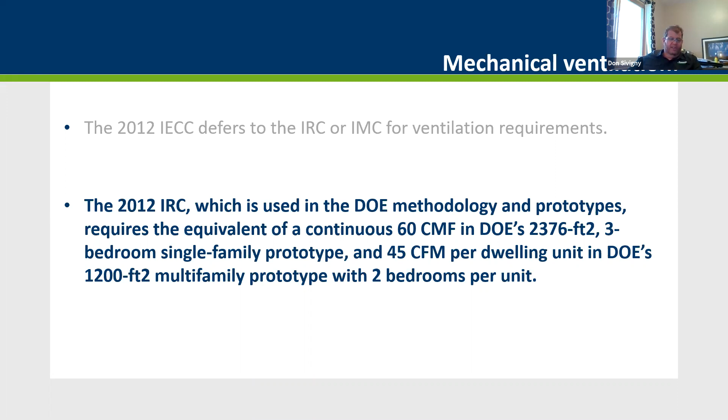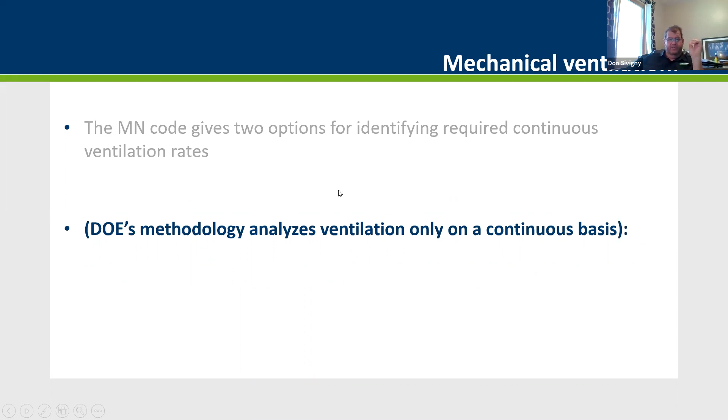Minnesota gives us 2 options for identifying continuous ventilation. DOE's methodology analyzes ventilation only on a continuous basis. We have 2 options: continuous and non-continuous ventilation. So we base it on square foot floor area.

When you look at the ventilation for a home today, you take 0.02 times the conditioned floor area, plus 15 times the number of bedrooms, plus 1 for the second person in the master bedroom. You divide that by 2 to get your continuous ventilation.

And then the total ventilation is the other half of that. So you can come up with the fact that you have 100 CFM of total ventilation, 50% of that has to be run continuously, that much per hour. So 100 of total ventilation becomes 50 CFM continuous.

You can put them on a cycler that does that for the continuous ventilation, but it cannot be controlled by the homeowner. This is something that just is set up and run constantly. The only way for the homeowner to shut that off is to unplug the ventilation system or do something to stop it, which is just not a good idea.

We have a different way of looking at that, in that we have continuous ventilation, and then the total ventilation, the other 50%, is what's controlled by the homeowner. So you're out there and you've got family over for the holidays, your continuous ventilation fan is working, and you decide there's a lot of cooking going on, the fireplace is going, and everybody's exhaling and things such as that. Maybe we need some additional ventilation in the area now.

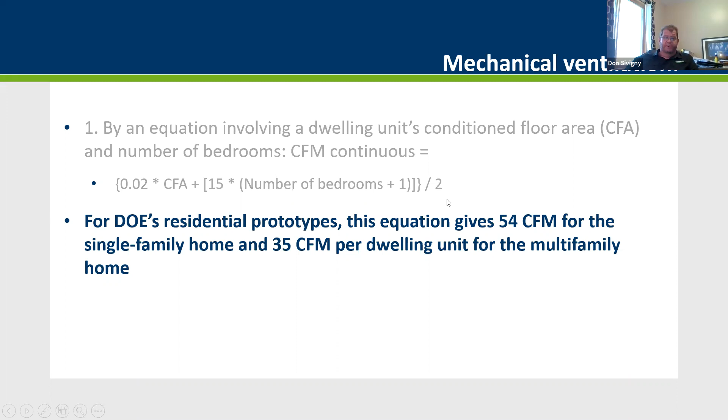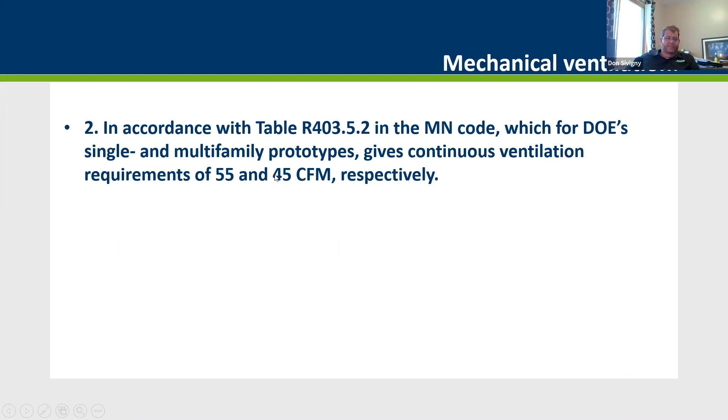So in accordance with Minnesota Code and table R403.5.2, based on their prototypes from the DOE, we have 55 and 45 CFM respectively. The analysis assumes lower rates required in the table. And because we require a balanced ventilation, which their methodology doesn't 100% simulate, it's more of a continuous exhaust system than a balanced system, we end up having to evaluate that by doubling the fan energy.

We had specific requirements for HRV, ERV installations. These are very popular in our state, in our climate zones, in the cold climate zones, in that an HRV, ERV installation, when installed as part of a balanced system, works very well. There are some requirements there from a standpoint of bringing air intake from the HRV or ERV as the cold air comes through.

A heat recovery ventilator basically brings the cold air from the outside, and it passes alongside a heat exchanger where the air from inside is going outside. It drops off the heat particulates that are then picked up and tempers that air coming in. But if that air is then dumped into the mechanical system, on the cold air return air side of the furnace, you have to make sure it's at a specific temperature of at least 50 degrees or more, depending on the appliance and the manufacturer of the heating systems, before it hits that heat exchanger, or we're going to start cracking heat exchangers. And then we're going to have carbon dioxide, carbon monoxide issues in the home.

So if you're doing that, adding an HRV or an ERV, which is an energy recovery ventilator, does the exact same thing as an HRV, but it also typically has a moisture wheel in it that will help balance the moisture loads in the house. As the air is going out, it deposits the moisture into this wheel. As the wheel spins around and picks up the air coming back in, it picks the moisture back up and kind of balances your moisture loads in the building.

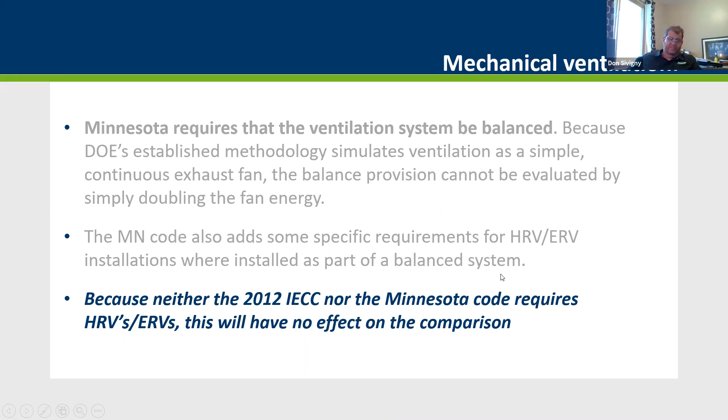There are some costs associated with bringing Minnesota Code up to the 2018 IECC, and they stem from all the differences between the 2012 and 2018 editions, plus all of our Minnesota amendments in 2012. For the analysis, the cost differences between 2012 and 2018 were taken from DOE's reports on cost effectiveness for new code additions, and they go this way with it.

They have a 30-year study period, and the 30 years is based on a typical home loan, a 30-year value on the home based on the home loan. They have a life efficiency measure, or expectancy measure, of about 60 years for that home to remain efficient. The rule of thumb in their mind is that after 60 years, through wear, tear, and degradation of products within the building itself, its efficiency tends to reduce. In Minnesota, we base that on about 100 years of life cycle of the building itself. They provide a discount rate, which is equal to the interest rate of the loan. They average it at a 5% year loan rate at 5%.

And again, a loan term of 30 years. They take out a 10% down payment. They add 0.5% for mortgage insurance, which gets eliminated eventually in their methodology after the loan balance is less than 80% of the home value. They have a loan fee rate, which they add in, and then an inflation rate of 2.52, which may be pretty close, maybe a little high. And then they include the income tax rate and everything else in there.

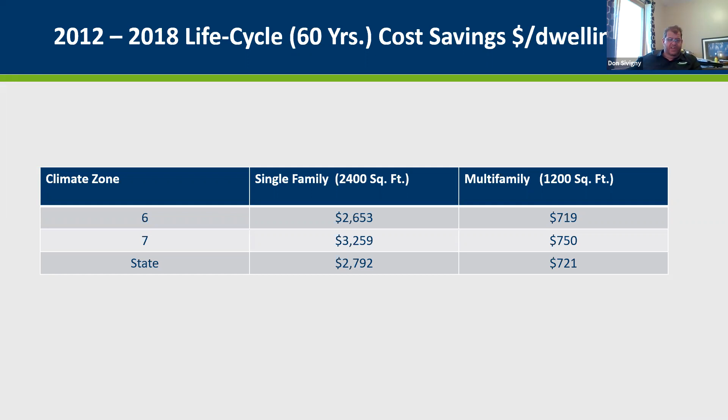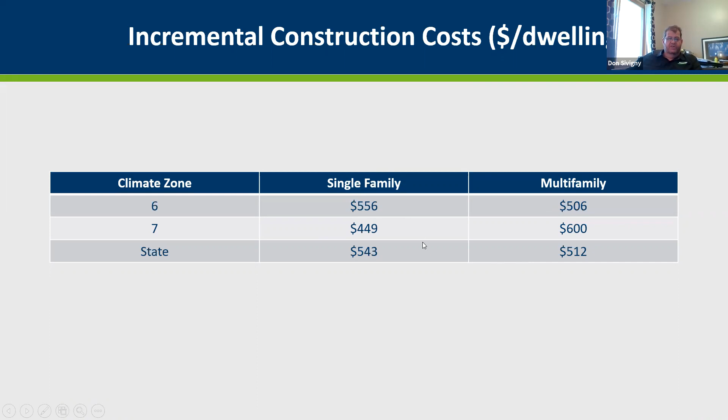Now, incremental construction costs, you've got to calculate those - they go up 556 to 506, 449, and 600, and again, state averages.

But when you put all of this together, you've got the life cycle costs and savings of the building at 2792 or 3259. But then you've got, in the red numbers, those things you have to delete from that savings, because those are construction cost factors and interest rate factors on the money you spend for the additional construction costs, of 543 and 506, 512 and 447.

Well, when you average them all out over the life cycle of this building, we're still saving $1,743 on every home in climate zone 6 and roughly $2,300 on every home in climate zone 7.

And so with that, we go back to the fact that the average here of 1,505 times the number of new homes built in the state. I talked to one jurisdiction north of me that said they're anticipating 100 to 125 homes this year, and it's just starting to explode and build up quickly. It's not slowing down. You start multiplying that 1,505 times every new building, and it adds up very quickly and becomes a huge cost savings.

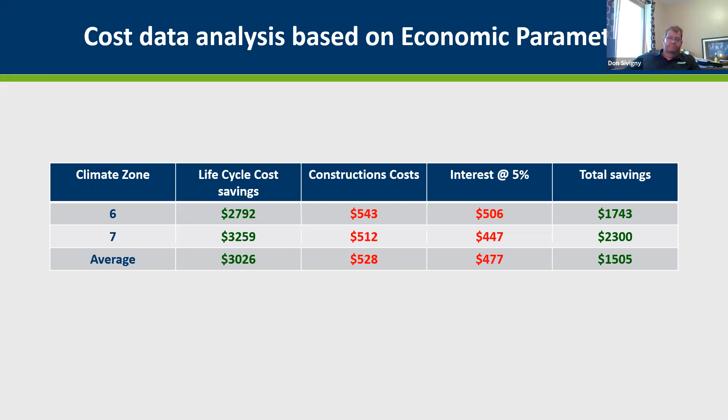So I guess we finished up pretty close, about an hour and a half. Ben's got some things that he wants to chime in with, and then I think we'll probably open it up to questions, right, Ben?